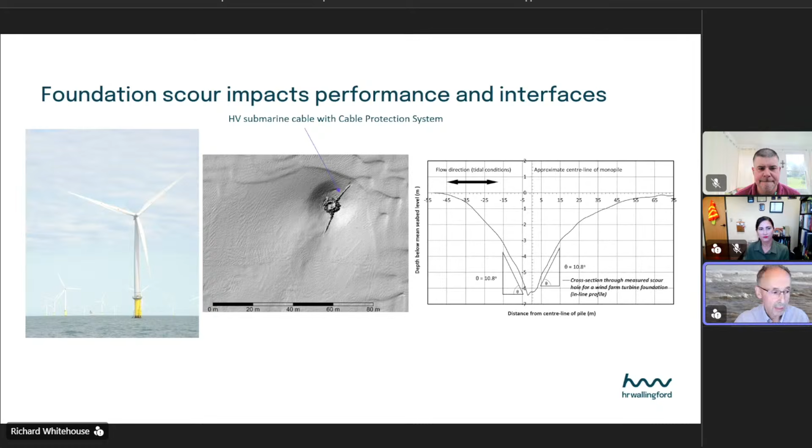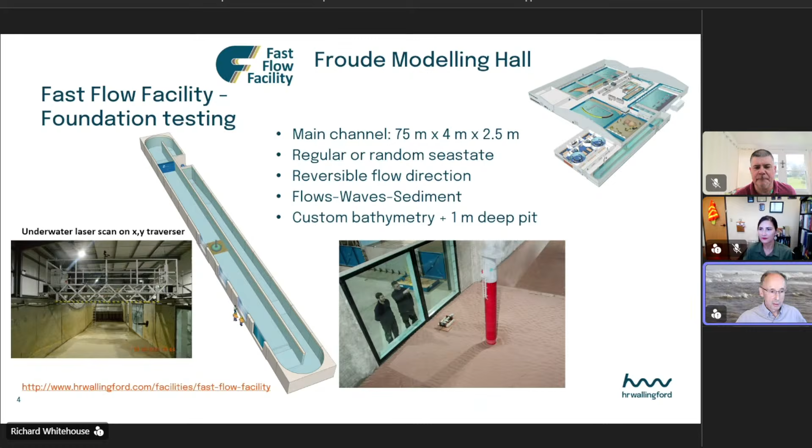So, large scale physical modelling. Our machine of choice is the Fast Flow facility, opened in 2014 in our Wallingford campus inside the Froude Modelling Hall. It's a 75-metre long channel, has an HR Wallingford design wave generator for regular and random sea states, some nice big powerful axial flow reversible pumps. And importantly, we have a 1 metre deep sediment pit below the concrete slab. This is quite important because structures don't stop on concrete slabs, they go down into the soil.

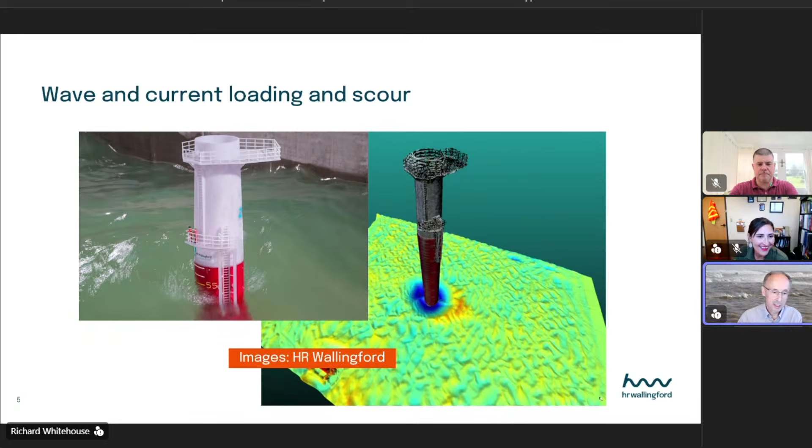So for example, this nice picture showing one of our models in action with 3D printed and specially introduced 1:20 scale offshore workers there on the platform. That goes down into the basement below the concrete slab into the sand.

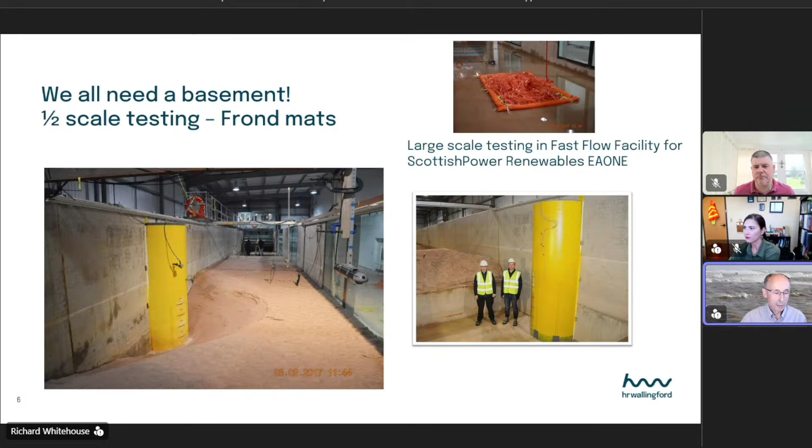And we drove scour processes up and down on this 100 tons of sand we introduced into the flume and created this very, very nice scour hole over a series of tidal cycles. We then did the mitigation testing. But that's why you need a basement, because you want to go big sometimes.

If we go a bit smaller, but in the same facility, I got very interested in the whole tidal scour problem, and particularly thinking about it as a cyclic process. So again, sort of thinking about geotechnical problems where there may be cyclic loading. How could we characterize the tidal scour as a cyclic process?

So we used a range of monopile structures with a mobile sandbed, fixed up the HR Wallingford scour probes on the front and rear of those. Those go down into the sand bed. We logged those at 1 hertz, so you could get a really high resolution, high precision time series of scour on the front and rear of the cylinder. We non-dimensionalized the scour depths with the pile diameter. We then work out the scour magnitude as the vector sum of those magnitudes.

And then importantly, at the bottom of the scour hole, we can think about what the slope is between front and rear across the pile. And I call that the basal slope. And there's a special case of this, that at some point, if that's horizontal, the slope is 0. And that actually, I think, is an important point to bear in mind in tidal conditions. And I'll come back to that.

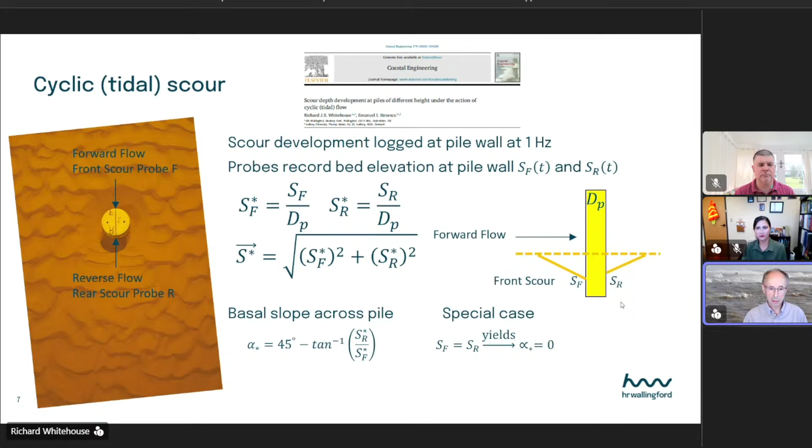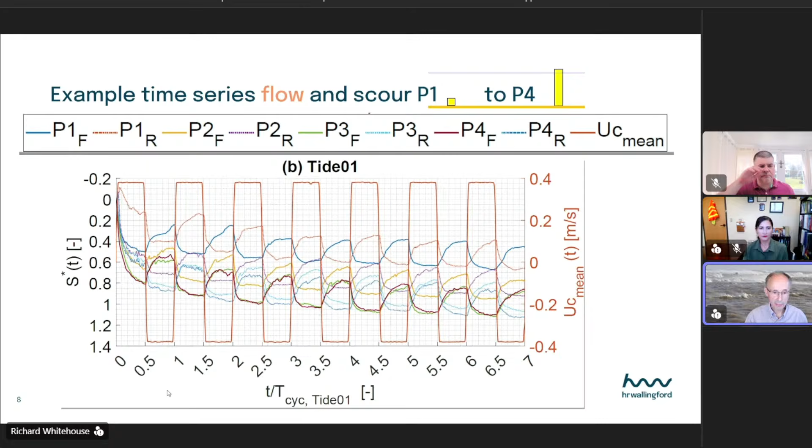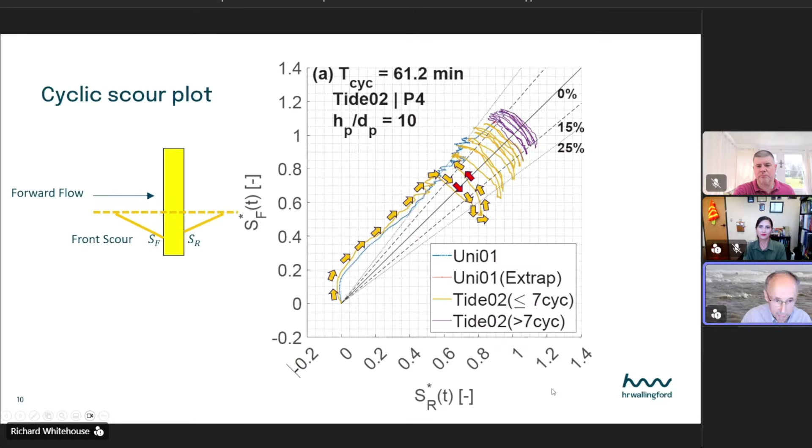And if you ran this for long enough, and I estimated maybe rather than 10 to 14 cycles, you might need 30 to 40 cycles, you might actually get down to the sorts of slopes that you would see offshore, which are maybe more like 3 degrees with a scour depth of 1.6 times pile diameter. So I think this provides some useful sort of basis for further analysis of cyclic scour processes.

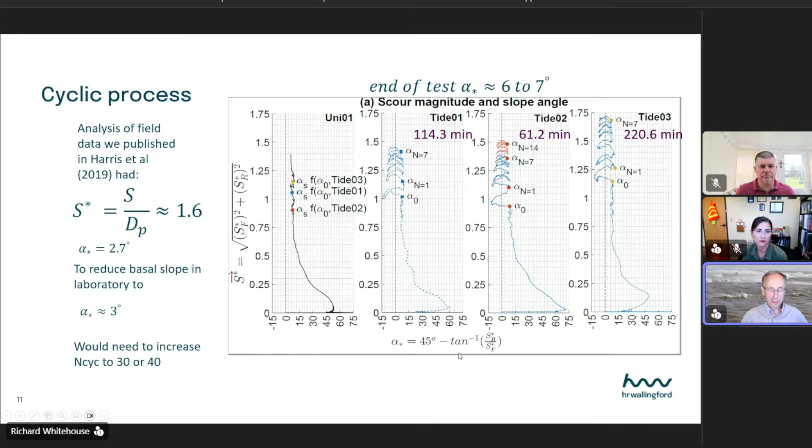You build a sandcastle of sand, you put rock on top, you run the test and you provide this falling apron of rock around the outside. That's great for proving your scour protection works as designed. If you want to get the dynamics of the structure as well, you can't do that. You've actually got to get rid of the sand by sediment transport processes.

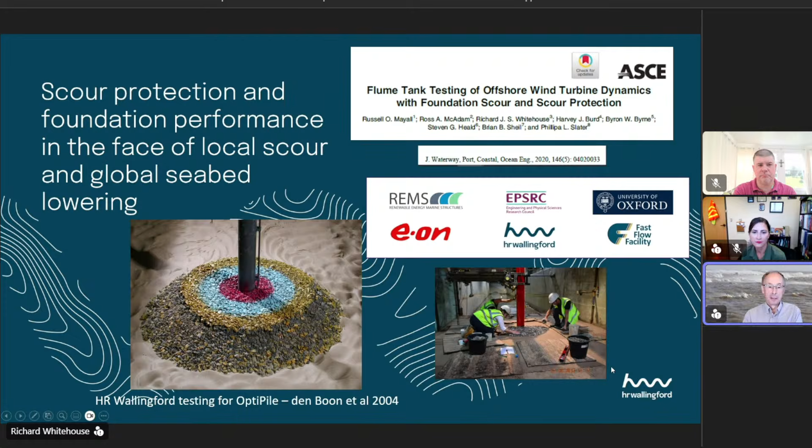So we had a great project with University of Oxford and E.ON, RWE, where we used the fast flow, drove the pile into this deep sand bed in the basement, put scour protection around it, and then we had to work out how to get rid of that sand by sediment transport processes. So I thought back to my work on rivers back in my bachelor's degree and thought about base level control and thought, hey, we can recreate base level control in a flume.

So on the left-hand side here, we've got the cross-section through the test section. We've got the sand. Either side of that pit, we've got some walls which are made up of bars going across the flume.

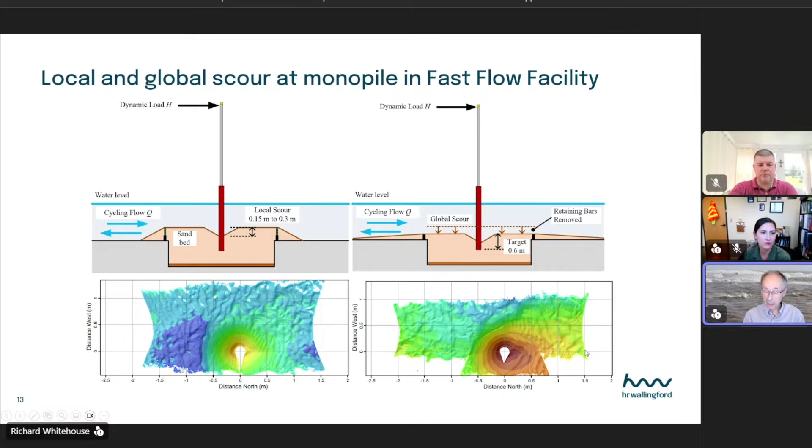So that keeps the sand in place. We can then put the flow, get the local scour. We then want to get the general seabed lowering or global scour. We can lift those bars up, which I had a willing team to help me. Here we are pulling bars up out the flume.

And it actually worked. I was really quite pleased with it. Although it was about test number 6 where I got it absolutely perfect and I got rid of the most sediment, because sediment wants to come back after you've driven it one way and you then turn the flow round. Lo and behold, it comes back again. Anyway, this all worked quite well, and I don't think anyone's done this elsewhere.

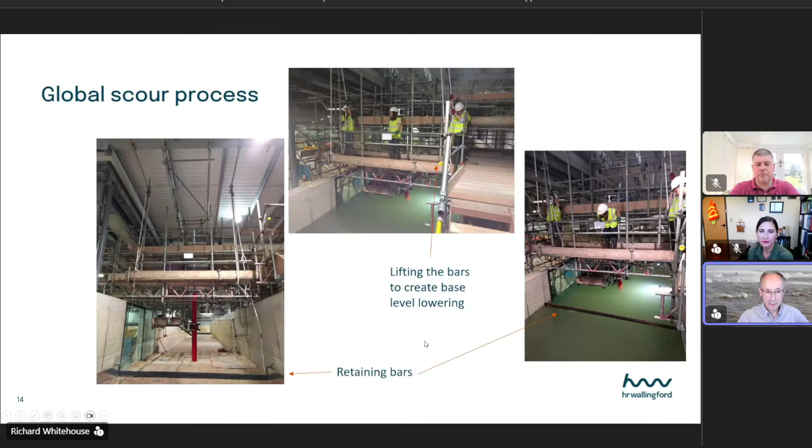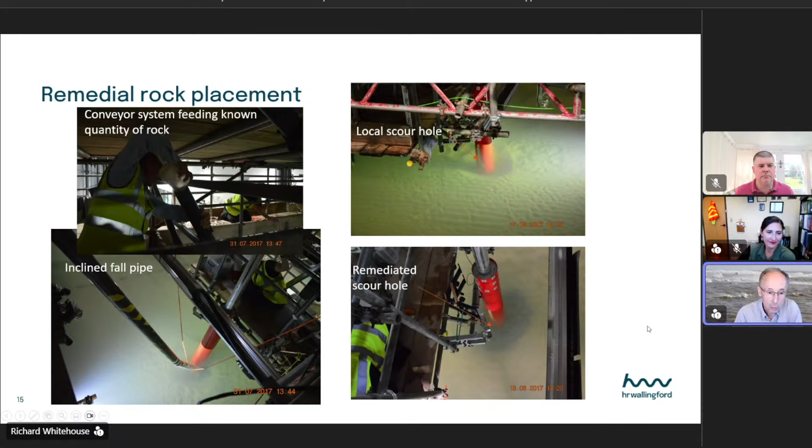So the important thing was it meant that the sand bed wasn't disturbed. And there was another side issue, which is we did some local scour. We then had to remediate with rock, but we weren't allowed to walk on the bed. So I devised an inclined fall pipe system, and I was the conveyor belt putting rock down the fall pipe. So that was pretty cool. Anyway, that all worked. The work's published, so there's papers available on that.

So I just want to go horizontal now. We've done vertical, go horizontal. Think about pipelines, think about how you might protect valve stations in the middle of the sea. And subsea engineers will use things like this valve protection structure, which has a pair of skirted mud mats with perforations. The roof on top protects the valve from dropped objects. So a lot of geotechnical design work, structural design work done on this, but there wasn't much information on scour around these structures. So I put together a program. We had a paper out in OTC.

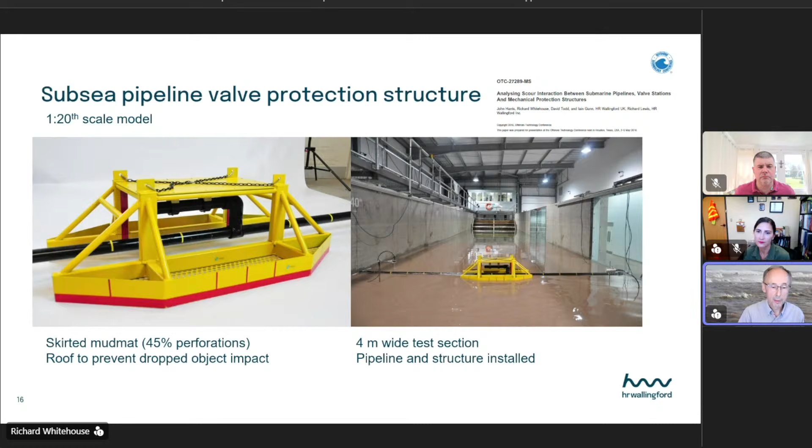So the nice thing about this, it actually allowed us to see some sediment transport processes in action. So I'm going to play this video. The flow's going from left to right. The thing to notice is this is for a flow case where the bed itself is not mobile. It's just scouring around the structure. And in the corner that's nearest us in front of the pipeline, you'll see a nice little spin up of an eddy. It'll pick sediment up and then it will be advected off down to the right-hand side.

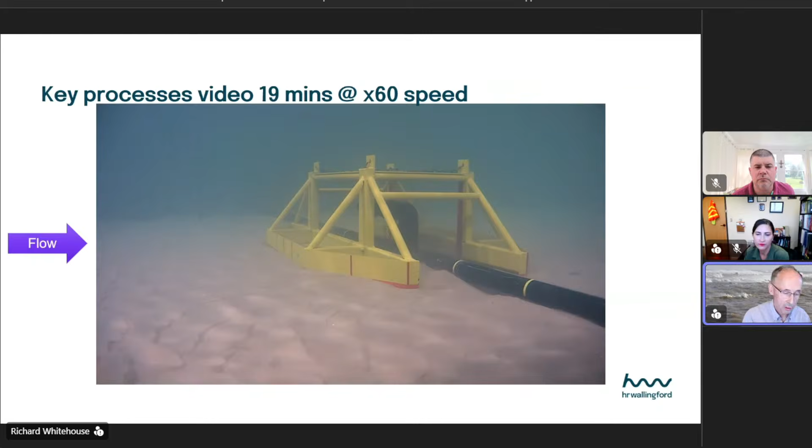And the other thing to notice is that pipeline, which is partially embedded, this is heavily sped up, now starts to have a free span formed under it. So this is one of these nice interface problems. You've got the protection structure there to physically protect the pipe, but actually there are some interesting boundary conditions for scour of the structure itself, but also of the pipeline.

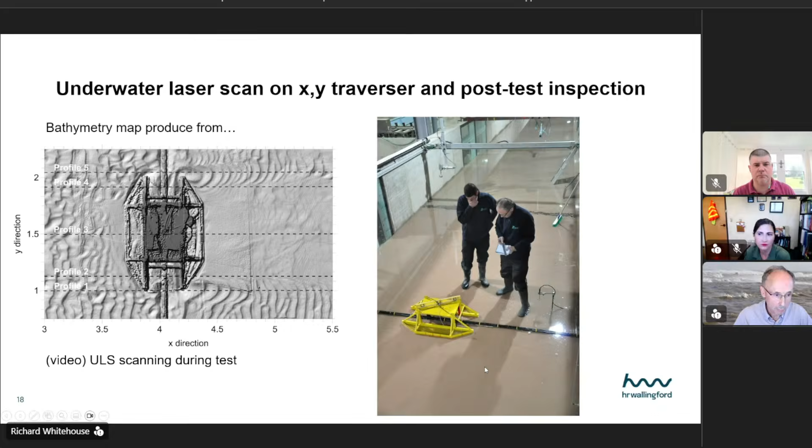Periodically through the testing, we can take underwater laser scans, produce these great maps to quantify the scour and the bed forms. And then afterwards, of course, go in and inspect what's happened. So that's an interesting transition problem between the edge of the structure and the pipeline.

If you want to protect your pipeline offshore, you may use an engineered rock dump placed over the pipe or cable. You may not be able to, or may not wish to put that very far along the pipe for various reasons, or you may be doing it in a series of campaigns. So the interesting thing there is that where you have an end, you again can produce underscour of the cable or pipe, and you can produce some very large lee wake features going down from the rock berm due to flow, vortex action, and turbulent energy.

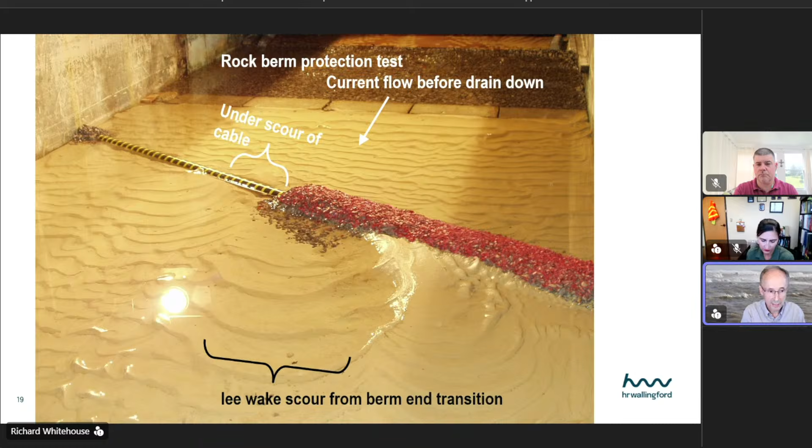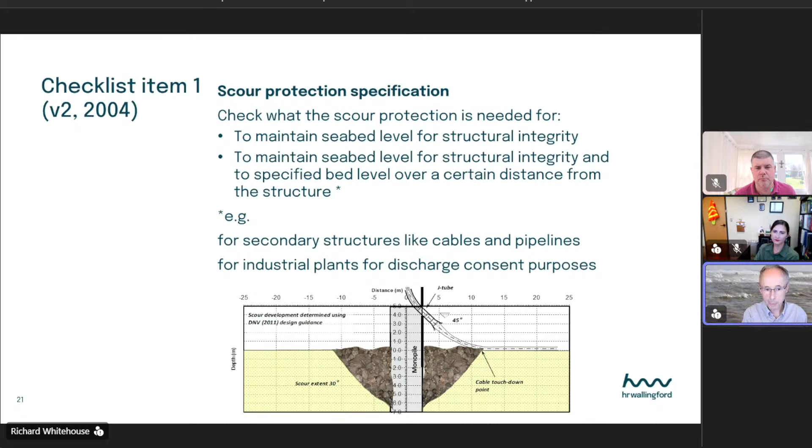So we can manage this. You have to think about long time scales. We maybe have 10 years between the feasibility initial surveys and operational phase of a project when the structures are in the ground working. You're doing surveys, you're doing studies, you need to make a scour management plan, keep a track of data, decisions. And then when you go operational, maybe you've got another 30 years of design life and you might need to remediate at certain times. So with a managed plan, you can keep track of all of this and get a good, successful project.

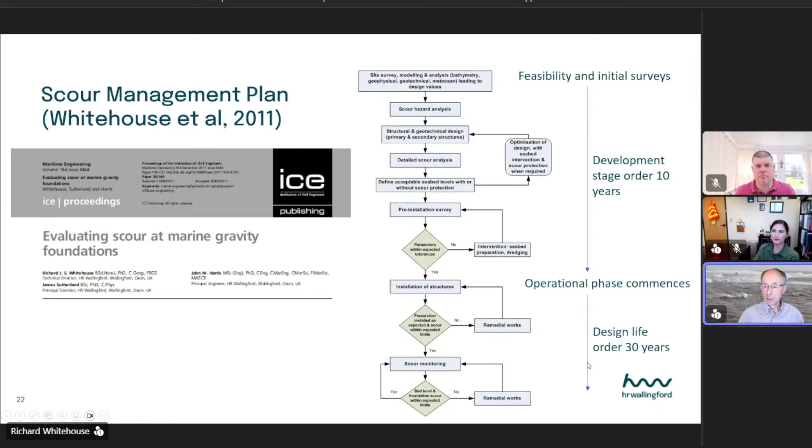So finally, thinking about my own 30-year design life, I had a great opportunity in writing a book some years ago. Here is a copy. I had a scour burial model in there called Drambuie, as it turns out. And then with some excellent funding from SERDP ESTCP and great collaboration with my friend Peter Menzel from Germany, we managed to do a really nice project on burial and migration of UXO for the SERDP ESTCP program.

And as part of that, with colleagues at Wallingford, I was able to update the time evolution burial model. Got to test it against some data from the Delta flume here with Peter, which was a pretty awesome experience as well. And we made a modeling application of it to Fort Pierce in Florida for Hurricane Matthew. So that's all available. It's all good stuff.